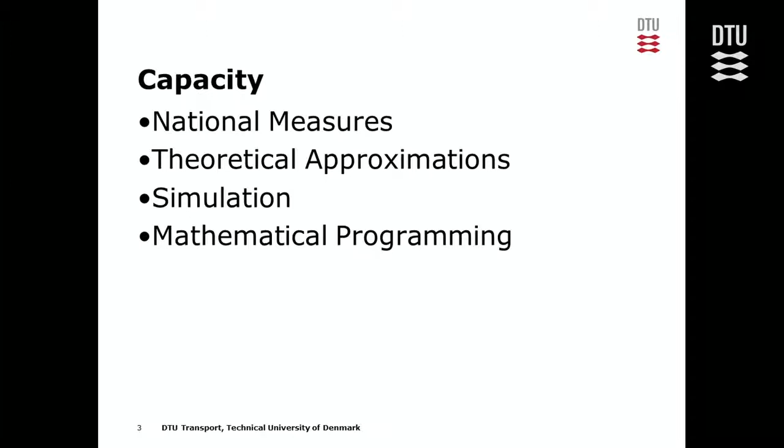So we're going to talk about the measures of capacity. And I'm also going to speak about these in national terms, because there are very different ways of viewing the business enterprise by nation. North America does business accounting very differently from Europe. There are differences of opinion about how things should be counted on the books between European and North American businesses. And there are different ways of measurement that are considered a priority in North America and in Europe for railways. So we want to be aware of that.

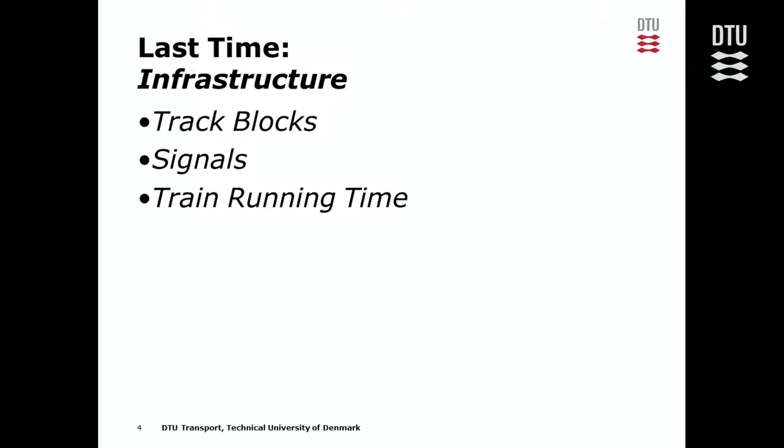We'll talk about theoretical approximations, parametric measures mostly, simulation, and then mathematical programming, which we've already covered, so we won't talk about that a great deal because we had a whole class on it a couple of weeks ago. Most recently, we got our grounding in the track infrastructure. So we know about our resources. We know about track. We know about train equipment. We've just done a homework assignment calculating the cost of resources. And we talked about signals and train running time over the infrastructure. So these are foundation pieces to build on going forward in capacity modeling.

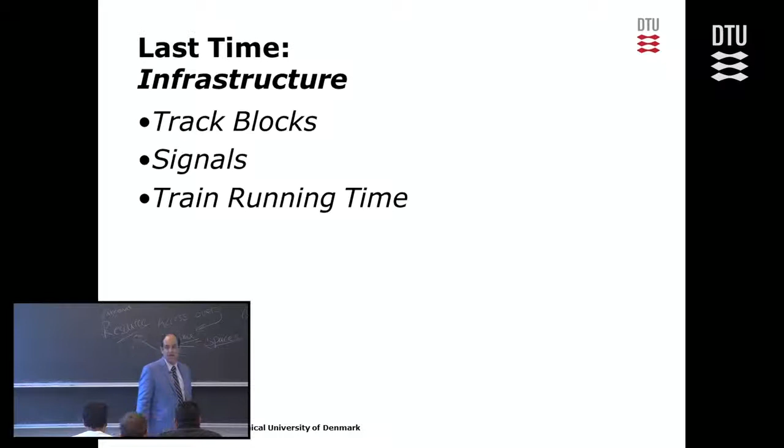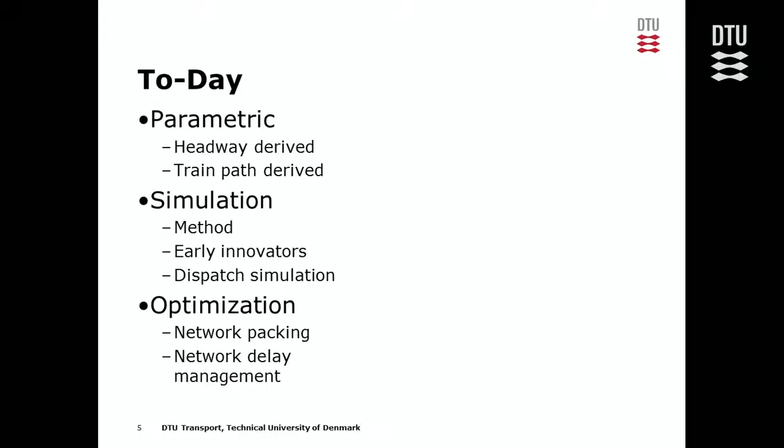So today we're going to go through parametric measures. We'll talk about headway measures, train path measures. We'll talk about simulation. I'll give you some nice pretty screen pictures of simulation products for capacity modeling. And then we'll quickly review optimization, which we've already covered, so we're just tying this topic into today's conversation about capacity modeling. What is capacity? Capacity is the capability to support traffic.

Traffic over a known resource, over a known piece of time, and then space defining the geography for us in transportation over a certain distance and geography. Time, space, and resource. What traffic can that support? That is what we're concerned about in capacity.

The problem is traffic has two fundamental components. Not just transportation traffic, but any business enterprise. If you go study operations management, if you take a hike across campus to the pretty building that DTU Management has, you will study operations management and you will once again learn that business services have two dimensions, volume and robustness. And they are constantly at war with each other. They are conflicting demands very often. So we are interested in transportation traffic, and we will see that there's a volume measure and a robustness measure.

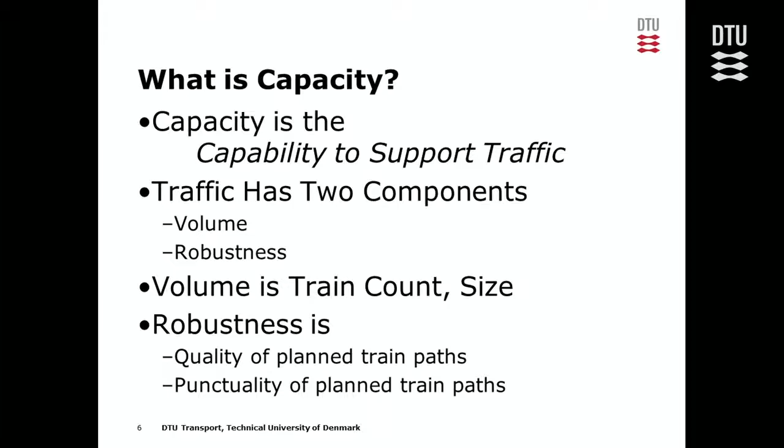Volume is flow, it is the rate of flow, it is the traffic, it is how many trains can I get down the track. So limitation. Sorry? So it's called limitation? Traffic is an output. It's not a limitation. It could be constrained. We will find that there is an upper limit to our capacity. There's a hard physical limit. We can see various configurations of resource and time that do dictate there is a hard limit to that capacity. We are going to measure that capacity in terms of the count of trains, the volume.

And if you get really economic, really supply chain oriented, you might say, oh, what if I make a bigger train? So I have the same number of trains, but now I have more volume because I'm carrying more freight, I'm carrying more passengers. Double-decker passenger train, stuff like that, double-decker car, superliner. Robustness is the quality of the train paths.

So we can get a lot of flow through the line, but if that flow is with a lot of station stops, or that flow is with a very bad travel time for the customer, or if that flow involves inconvenient travel times, or if the punctuality of the flow is really bad. If we have a high average flow, but our variance, our timekeeping is really bad. That is, we have a very high variance, we have a very high source of error, we have a very high probability of delay at the stations or en route. That is a robustness measure that we are making worse. That we're getting high variability means bad robustness. And so that's another measure of capacity.

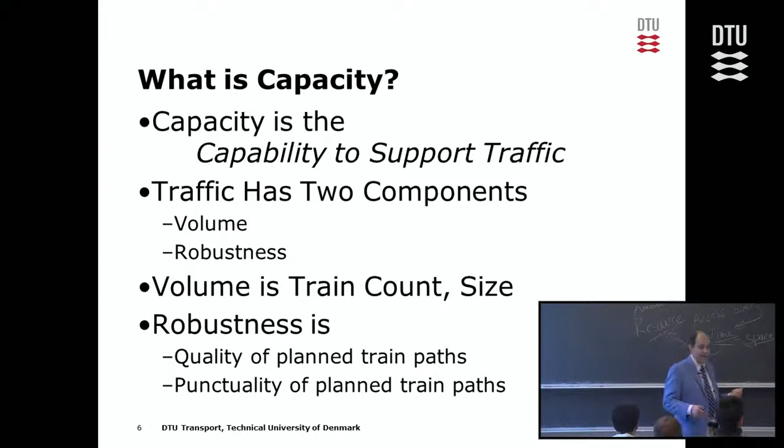And the reality is that the two continents, the two different ways of thinking about capacity have basically followed these two lines of reasoning. And they are rooted in legacy thinking, they are rooted in historic precedent, they are rooted in fundamental assumptions about the economics of rail transport and the services provided to the customer and how we're going to drive this thing. And so in North America, the fundamental measure of capacity is train delay.

You go on a business call, you go on a meeting with somebody from Union Pacific or BNSF, you go to a conference, you go to a discussion with anybody from North America, and you start talking about capacity, and they're going to start throwing numbers at you like, how many minutes of train delay per mile do I have? How many delayed trains did I have yesterday? That's their measure of capacity. The delay, they are focused on delay as their measure.

They are implying that all of the delay is a reduction in capacity because we are slowing the trains down, and if I slow the trains down, I'm reducing my flow, Little's law. Longer travel time must mean that the flow is going down if the capacity stays the same, if the inventory stays the same in Little's law.

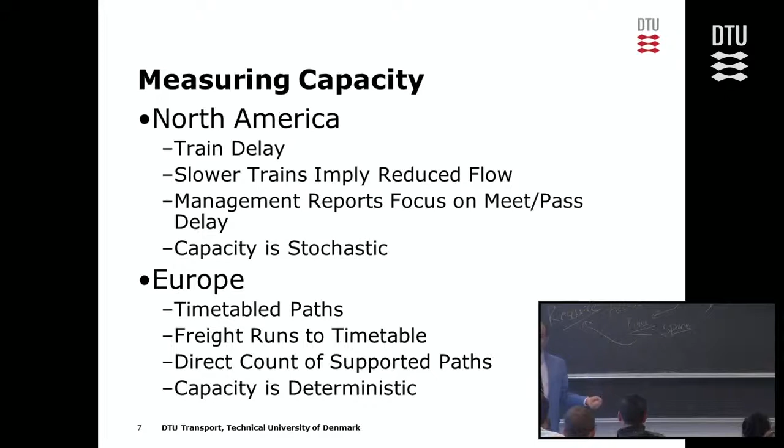In Europe, it's all about measuring flow, because in Europe, the presumption is that we are on time. There isn't going to be any delay. We're all running to a timetable. There is no delay. This is the timetable. The train's going to run to this timetable, and there's no argument, there's no discussion. This is the timetable. Platform 2, 13:52, stand there. The train's going to be there.

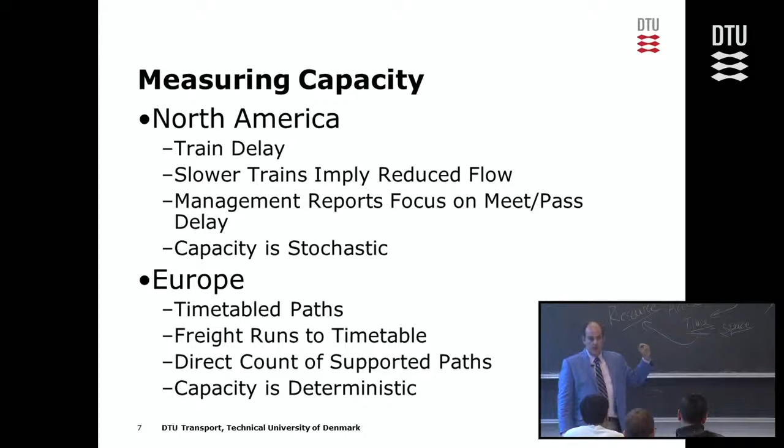So with that assumption, then, we are all counting train paths. We are counting rates of flow in our conversation about capacity in Europe. We're counting train paths. And you see that in the conversations people have, and you see that in the way the software generates results and the way the software generates output.

Here is a sample output for North America. And I chose this just to reinforce this: you look at this table of data, and it's all about delay. How much delay do I have? How many delay minutes per 100 train miles do I have? This is a very typical kind of management report for a North American railway system, because this is where they're focused. This is what they're all about right there.

Little's law again, right? Let's refresh this. We've talked about this before. Inventory equals flow times time. So now we're going to flow this around. We're interested in capacity, so we're going to say capacity is flow. Capacity is a rate of flow. How many trains per hour can I get down the railway line? It's going to be a function of how long it takes the train to get down the track, and how many trains the track can hold. That's my capacity right there.

And very often, time delays mean time gets longer, time gets worse. So North America is looking at this and saying, hey, we're going to keep this time tight, squeeze this down, no delays. We're going to call in that crew that just delayed the train for an hour. We're going to, quote, call them on the carpet, as they say in North America. What does that mean, call them on the carpet?

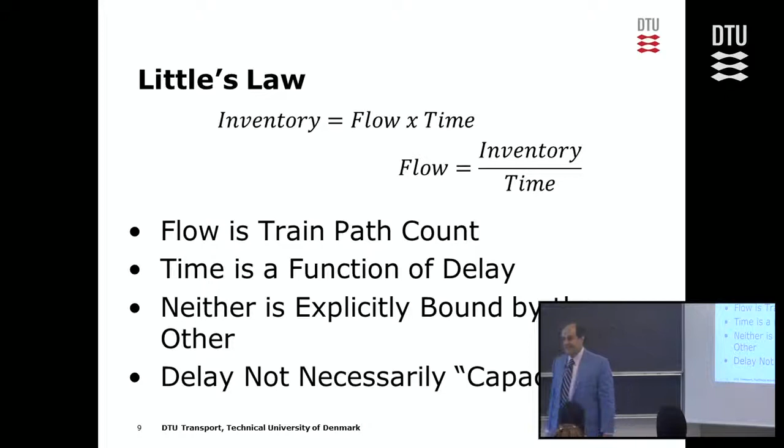Yeah, it does, but why is it call them on the carpet? What is it about the carpet? See, it has no meaning here in Denmark, because there's no damn carpet anywhere. I miss carpet. I really miss carpet. The hardwood floor is just getting a little old after a while. Where's the carpet?

So you're a train crew. Yes? Yeah, exactly. You're a train crew, and you're wearing boots and overalls, and you're greasy and you're dirty. And the executives up in the boardroom have carpet in their offices. So if you get called on the carpet, you're being called up to headquarters to explain yourself. What did I do wrong? So you've got to explain the time delay, because this is the function North America cares about.

But in Europe, this is assumed under control. So in Europe, we're about how many trains can I pack into the network? We focus on the track diagrams, the station diagrams, and allocating trains to platforms and stations. How many trains can I pack into the station? Well, that's inventory. The more inventory I've got, the more flow I've got. How wide are my blocks? Let's make more signals, more blocks. I can pack more trains on the network. Increase my inventory, more flow.

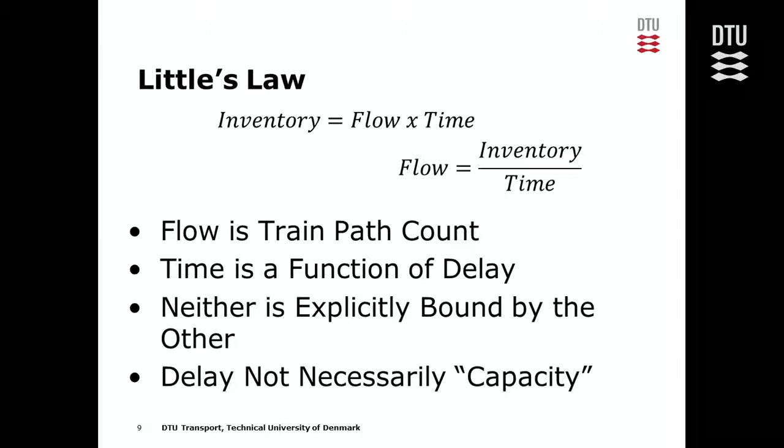So, time-centered, resource-centered. This is where we're at typically in this conversation. It's changing because some things are starting to merge. Europe is trying to reinvigorate freight transport. That means talking about longer freight trains, and some major changes to the network. North America has a very congested network, and can no longer, at least in the research that I have argued, focus only on delay as a measurement of their dispatch and of their rate of flow.

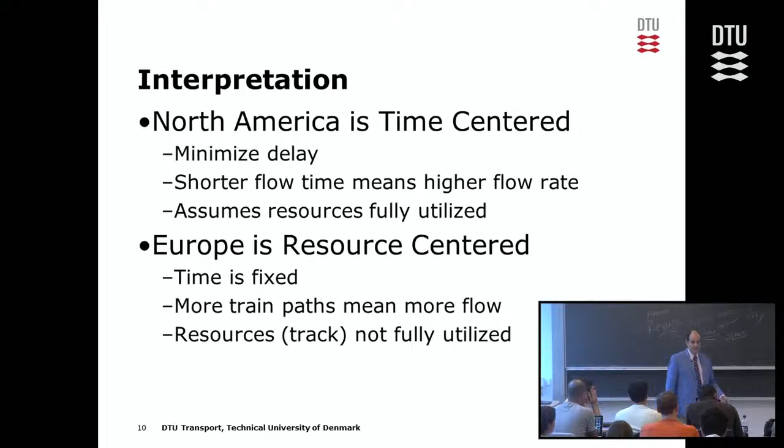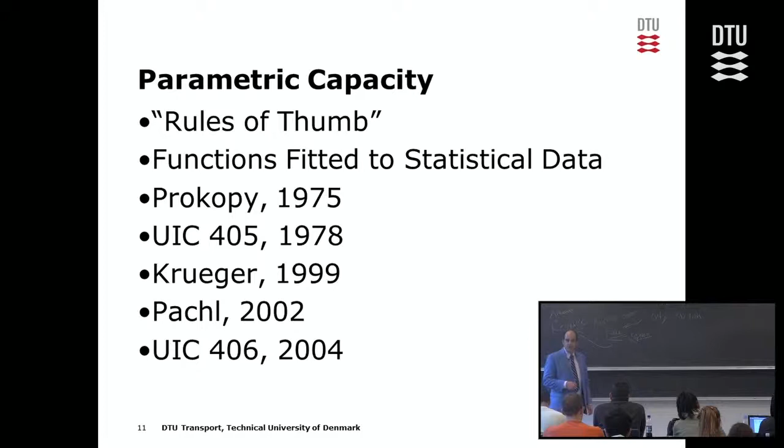So let's talk about parametric measures. We've kind of mentioned this before; I've used the word parametric. These are various rules of thumb. We're going to fit these things to statistical data. There are a couple of key players in this conversation. You can find more, but these are the ones that I have argued are the benchmarks, the touchstones of our history of railway engineering. This guy, Prokopy, I'm probably not pronouncing it correctly, goes way back. This is one of the very often cited measures of railway capacity.

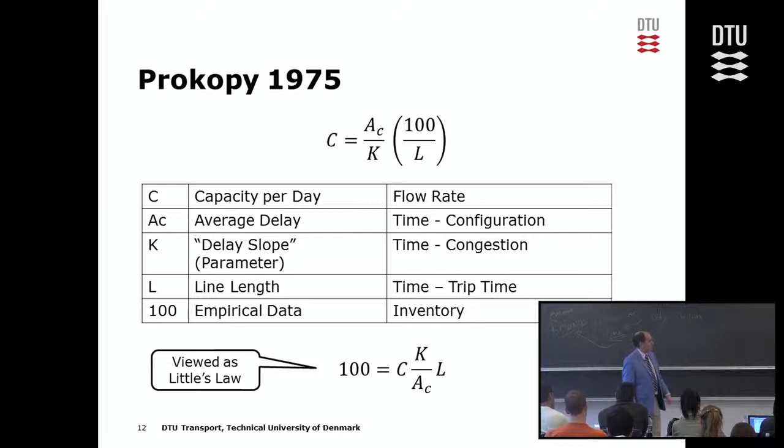Again, this is a parametric measure: he's taken statistical samples of data from real operations and fitted it to a function. And we are using something very much like Little's Law here. We have a placeholder for inventory, and then we are manipulating time and rate of flow in these equations to get a view of our capacity. And then we have the International Union of Railways. That is French, right? Union Internationale des Chemins de Fer, something like that.

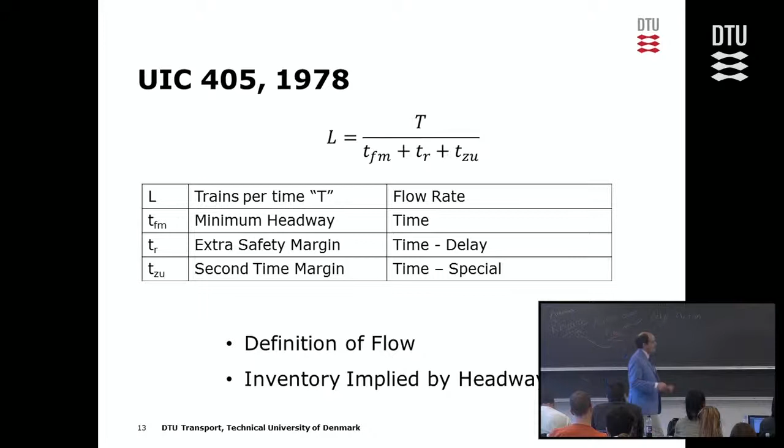That's our international union right there. And so back in the 1970s, they're really focusing on flow. They're focusing on headways, and they're focusing on ways to measure how much flow they get, not really getting the full measure of capacity in terms of Little's Law.

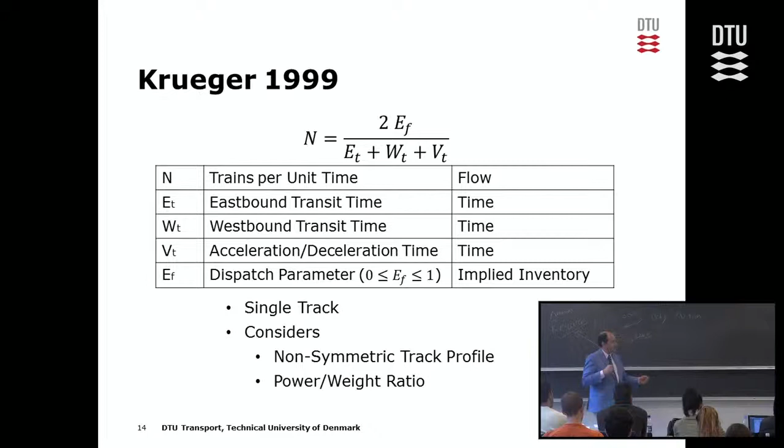So we move forward in time here, and again, we're still looking at flow. There's a little bit of an implied inventory with Krueger here in this equation, but this is significant in that he is trying to look at two-way directions on track, because we have single-track railroading in North America. Krueger's a Canadian guy, Canadian National, and he's concerned about single-track railways, so his function has a provision for opposing traffic in his estimation of capacity on the line.

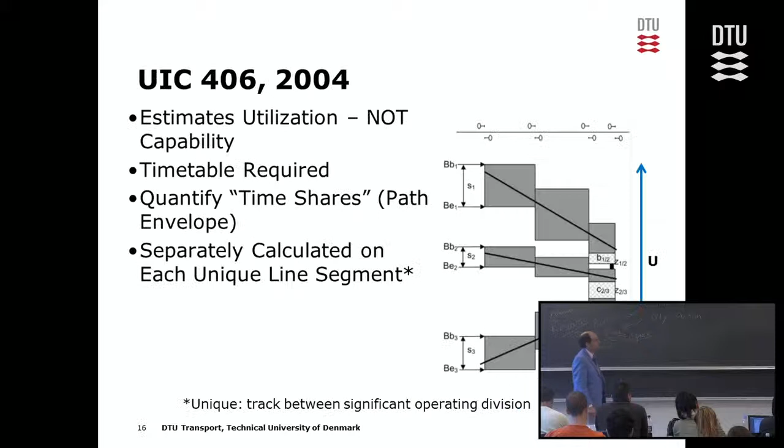And then finally, the UIC 406 method. This is really kind of state of the art in terms of how people visualize capacity calculations in Europe today. This fundamental idea is timetable compression. And the key word is timetable. You have to have a timetable before you can use this. Most railroad traffic in the United States does not run to timetable, so this is totally irrelevant to North America because we don't have a timetable in the first place.

Most train traffic in the United States is randomly dispatched, like a taxi. They line the trains up in the yard, and they look for a clear slot in the track, and they say, go. And the train pulls out, and you cross your fingers and hope it gets there. And seriously, I'll tell you why. Much of North America, it's getting better.

It's getting better, especially on high priority lines, lines like the racetrack, the Transcontinental Corridor on the BNSF, that's Los Angeles to Chicago through New Mexico. That's a racetrack. It runs intermodal trains. They run like streetcars. I've done this. You can stand up on a mesa and look out for miles across the Breaking Bad territory of New Mexico, and you can see the BNSF main line, and you can see multiple intermodal trains running in the signal wake of each other out in the heat of the desert.

You know, 3 or 4 intermodal trains, each one of them like 70, 100 cars long, following each other with a 2-block separation along the track. And they have to really hustle, because that's all those Christmas lights from China coming to Chicago. They're coming by container. They're unloaded at Long Beach, Los Angeles. They go onto a container train. They go to Chicago, and then they go to Walmart. And that's how we get all the consumer goods in the Midwest so cheap.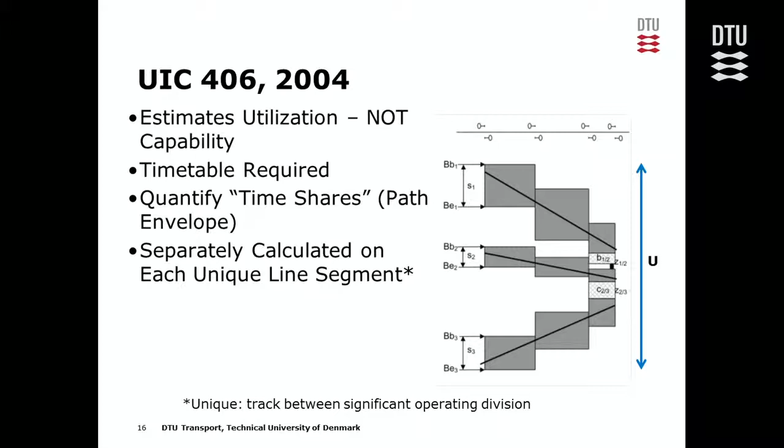So they're getting more picky about this kind of stuff. But they really still manage a flow. Tonnage-based railroading is what it's called. Tonnage-based railroading says, I'm going to store freight cars in my yard. I'm going to store up freight in my railway yard. And when I've got enough tonnage to make an economical train, I will call a crew, literally call a crew on demand.

Railroad crews in the United States work on demand. They do not have a schedule. They wait at their home for the phone to ring, and then they go when they're called. The crew shows up, couples up the locomotive, tests the air, and away they go. And if you're tonnage-based railroading, it means you're minimizing the horsepower per ton. It means you have trains that just have enough horsepower to basically make it over the highest grade profile on the line.

And what happens is you have a bad rainstorm, you have a miscalculation, you have a flat wheel, you have a locomotive with a turbocharger that's acting badly, and now suddenly a train stalls on the hill and you have to double the hill. You back the train up, you cut the train in half, you bring the train up the hill in 2 pieces. And you've just locked up the whole network for 3 hours behind you. So that creates a lot of variance.

Now, they're getting better at that. They're doing a lot to really stop doing that. That doesn't happen the way it used to. A lot of operations research techniques are being applied to doing things like, let's not make that happen anymore. More carefully matching locomotives to train size, more carefully managing these kinds of things.

But the reality is, in North America, we are still running a tonnage-based railroad, and that does lead to a lot of variance and a lot of delay on the network. So anyway, UIC 406, Europe, we're going to compress this timetable. We've got a timetable. We have our train paths. There's our track network right there with some signals showing the blocks.

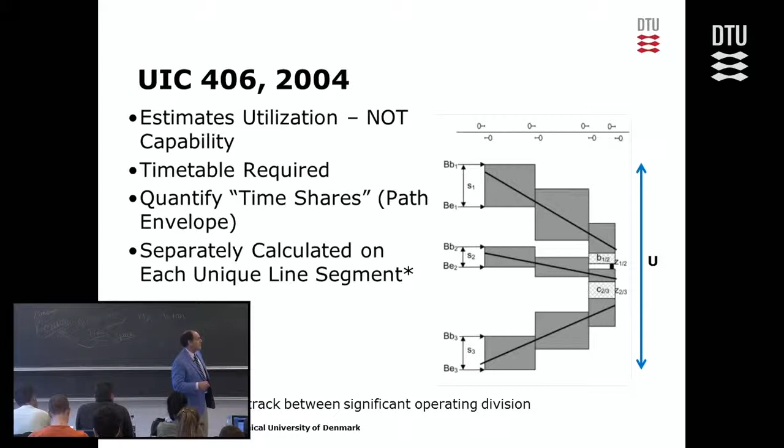And in this particular case, we have a 2-directional track. The signals are facing both directions here. So just for argument's sake, let's say time is going up this way. So this is 9 a.m., 10 a.m., 11, 12, 1 o'clock, 2 o'clock, 3 o'clock, et cetera. And so this train is going that way on the track. This train is going that way on the track. But this train is going the other way, is going down this way.

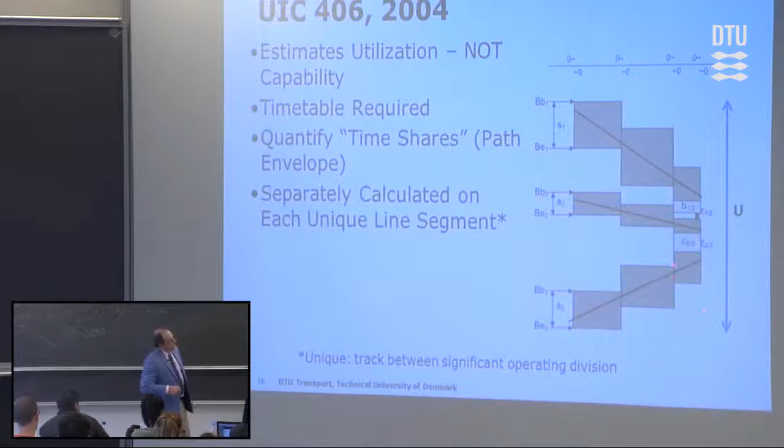And these are what we're going to see here in a few minutes. These are called the block occupations. And so the idea here is this is the timetable for the track network. And this boundary, this edge and this edge here, are the total amount of time occupied by these trains on the network at this point in the conversation.

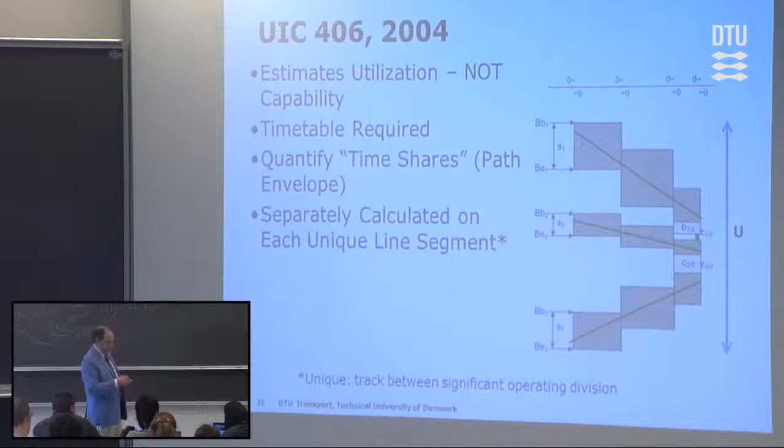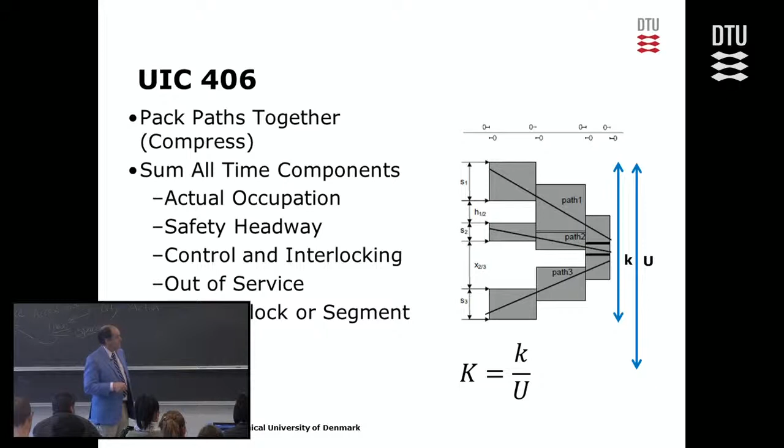And what we're going to do is then manually, or with the aid of some software perhaps, but essentially just redraw this picture and squish these paths together until they're touching, until they just bang up against each other. And we're going to ask our question, how much time on the network will these train paths consume if we squish them all together into the tightest pack we can get?

Measure that, which is this lowercase k right here. How much time do they occupy on the network when they're completely pressed together, as much as they can be safely? And then we have our utilization of the network. So the UIC 406 is not really a capacity measurement in the sense of a quantity or in the sense of what is the rate of flow. It is a utilization measurement. So it says, what % of the resource am I utilizing? How efficiently am I utilizing my resource with this particular timetable or with this particular track configuration?

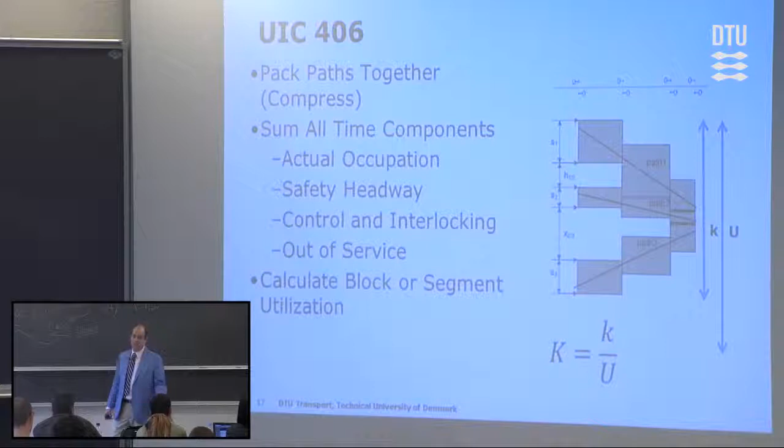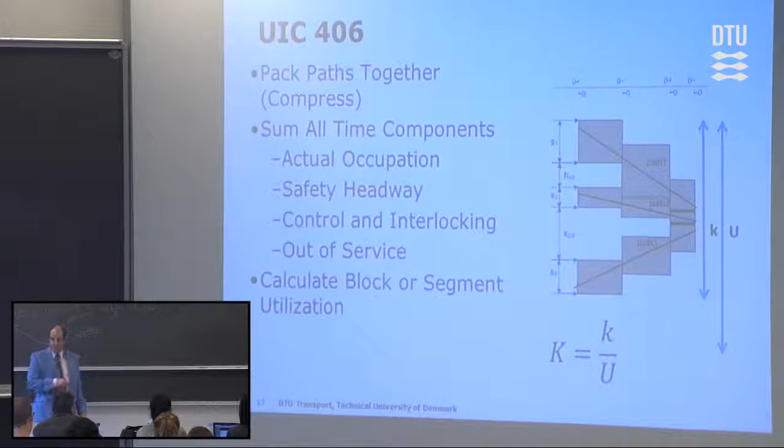We will spend more time on this. After the coffee break, we will have some exercises and we will look at this again in some more detail. But it really is pretty much just exactly what I just told you. You can have better tools, you can have things that automate the process for you, but if you got enough time, you can do this whole thing by hand on paper, just like I just demonstrated.

So those are parametric methods, equations, manual methods to kind of estimate the consumption of the track resource. They are all static. I'm going to back up a second here. Static, static, static. The answers don't change. I can go through these slides 5, 6, 7 times, but the answers don't change. The answers are all the same because I put some numbers in and I give you an answer out and we're all done. We go home for coffee.

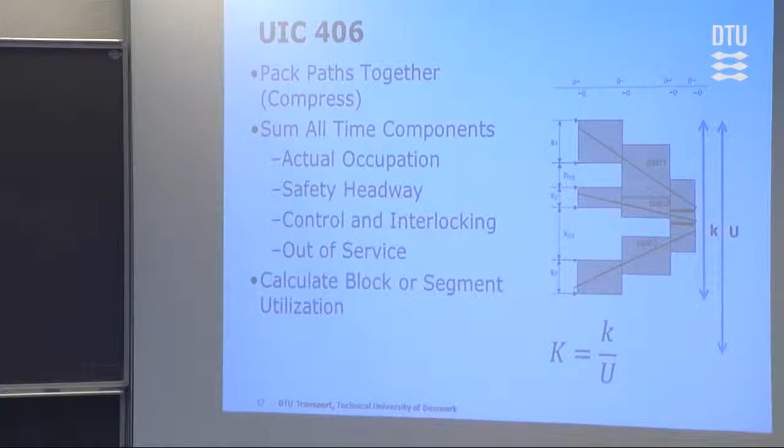But the reality, of course, we know is, as I just described with the tonnage-based railroading in the United States and in Europe, little things like little old lady gets stuck in her wheelchair at the entrance to the coach and suddenly the train can't pull out of the station, stuff like that. We have variance. We have random delays. We have weather. We have service issues, we have breakdowns, we have random delays.

And so now we want to measure the capacity of our network for its robustness, for its ability to carry traffic, within a certain boundary of robustness, a certain boundary of reliability. And to do that properly, we then do need to use simulation. We need to randomly sample patterns of operation and evaluate how the network responds to variation in inputs, variation in weather, variation in train behaviors. And so that's where we get simulation.

Those of you who may have had some prior experience in, quote, simulation, discrete event simulation is what we're really talking about. These are all various simulation tools specific to railways. They are discrete event simulation tools specific to railways. Canadian National in North America is the leader, the innovator in this back in the 1950s. Way back in the age of the mainframe computer, the IBM mainframe, Canadian National started writing simulation programs to simulate the traffic that they had on a single track railway across the Rocky Mountains in Western Canada.

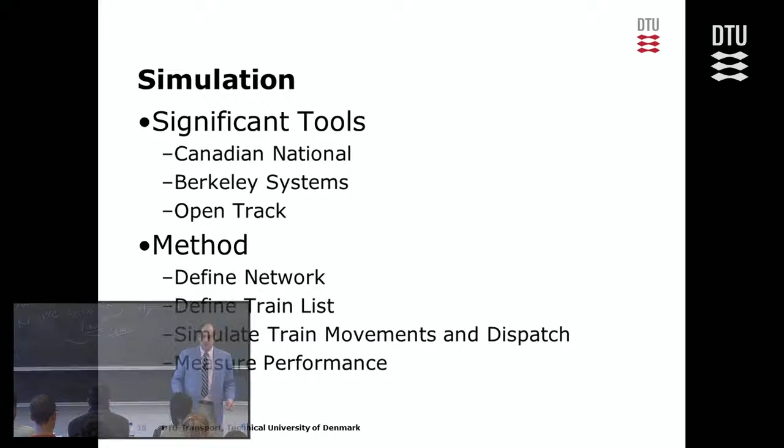And so they were leaders in this. And then more recently, we have this company called Berkeley Systems in North America that is pretty much the de facto standard for simulating North American railway track operations. And then OpenTrack is another method that's kind of a big standard here in Europe, although there's more competitors in Europe. In Europe, we have a few more competing companies doing this kind of thing, but OpenTrack is a very good example. How do they all work?

They're all very similar. They have to have some kind of user interface for defining the track network, some way of inputting data into the system that says, here's the track, here's where the signals are, here's where the blocks are, here's how fast the locomotive can accelerate. All this information has to be put into the network, and then we define for the simulation, what trains do you want to run on this network? What kind of schedule do you want to run? What kind of pattern of service do you want to run?

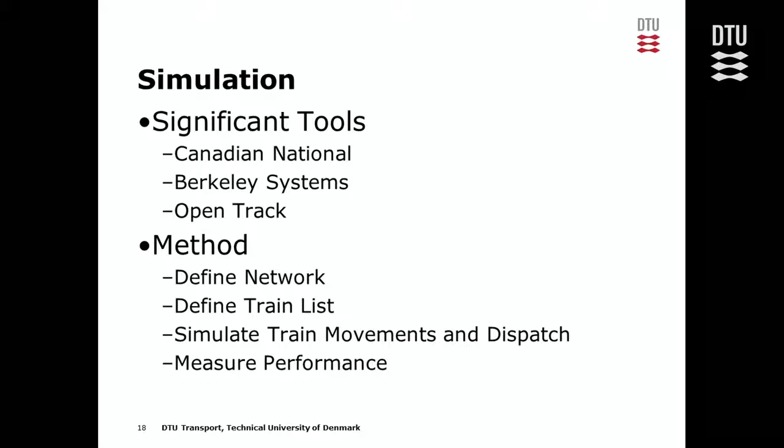And then we want to simulate the train movements. What does that mean, simulate? For those of you who don't know what that means, it means we have a train, we have a process that's going to run, but we know for a fact that this process is subject to random variation. So we are going to input into the simulation software the statistical formulas for the distributions, the random probability distributions of the things that might happen that are not specifically known, that are random.

And then we're going to tell the software to run a game, almost a game interface. We're going to run a game of the dispatch for a day, and we're going to randomly sample things that could go wrong with those trains and fit them into the pattern that the game is simulating of the train movement. We're going to collect the data from that run, write it down in the database or in the computer software. We're going to back everything up, and we're going to do it again. And the software is going to pick a new set of random numbers that simulate the various things that could happen to this train and do it all over again.

And the software is usually going to do this hundreds, thousands of times, and then aggregate all of these results from these random samples and give you some kind of statistical picture of, here's what I think is likely to happen with this rail network over a variety of possible outcomes. So let me show you what that looks like.

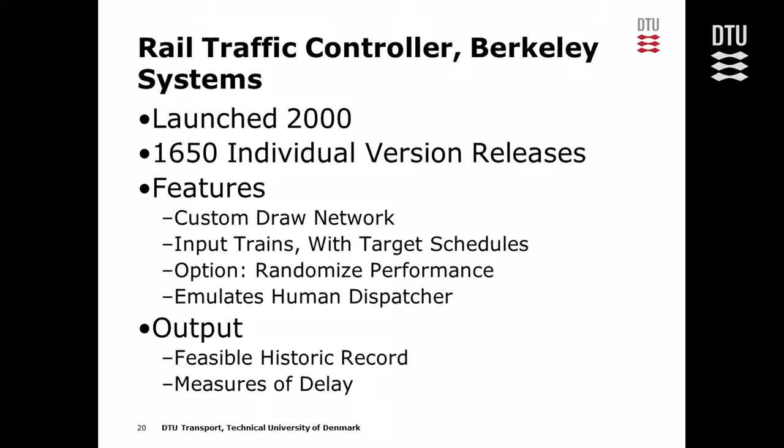Of course, here I mentioned to you already Canadian National. We've talked about this signal wake model. I've talked about this in terms of signals and in terms of run speed. But again, you can look in the quoted literature from the guys in North America, and they're really focused on delay per train mile. And so how are we going to do that? Berkeley Traffic Controller. I'll just jump straight to the fun pictures here. So here's Berkeley Traffic Controller.

And then you can tell it, okay, SD40 diesel locomotive, 6-axle power. How fast can it go through a 20-degree curve? How long does it take to clear the switch? How many feet does it have to be before it's in clear of the switch and the points are open? All this kind of stuff. You can put all this into Rail Traffic Controller.

And then we tell Rail Traffic Controller, oh, I want to run a whole bunch of coal trains. I want to run 12 coal trains, and I want a general mixed train, and I want to run an intermodal train, and I'm going to set that all up in the little kind of, quote, timetable. It's not a timetable like you understand a timetable.

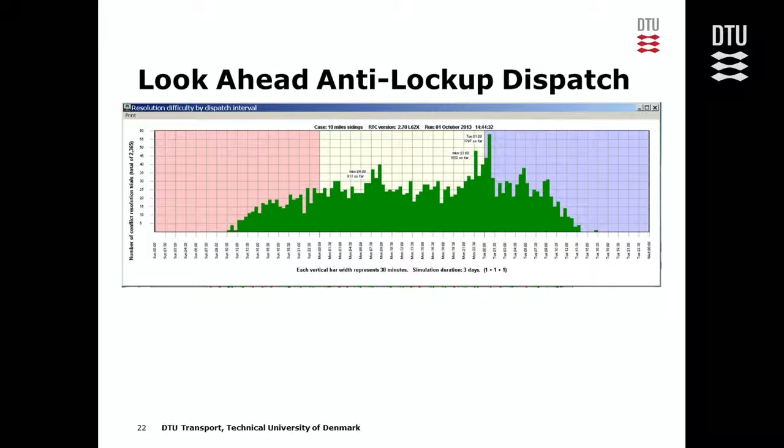It's just a wish list of trains I want to be running on this network. And Rail Traffic Controller's big selling point, its big feature for the North American market, is that its calculation engine is designed to emulate the behavior of a human dispatcher under North American service.

So you say go, and it lines up these trains for their departures, and then it starts simulating things like, this locomotive just had a brake failure. This train got stuck on wet leaves, and it can't get up the hill. This train is running slow because there's something goofy going on with its diesel prime mover. And it simulates all that, plus all the interferences on the single track line, and where are we going to meet and pass the trains at the sidings.

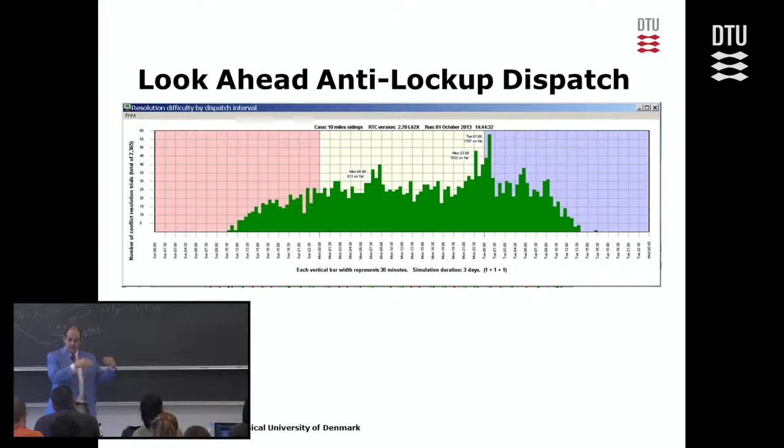And it simulates what it believes the typical human dispatcher, because most traffic in the United States is dispatched by human beings in a dispatch center, and it still is true in Europe too. How will the dispatcher plan that dispatch? And it simulates that. And then what we have here is a graph that Traffic Controller generates while it's running the simulation.

This bit here is the warm-up cycle, where it's just warming up the random number sequence for the simulation. This is the actual sample period for the run of the simulation. And then this is the cool down at the end of the simulation. So this is really where the data is collected from. And this green stuff right here is, quote, the dispatch conflicts that are resolved.

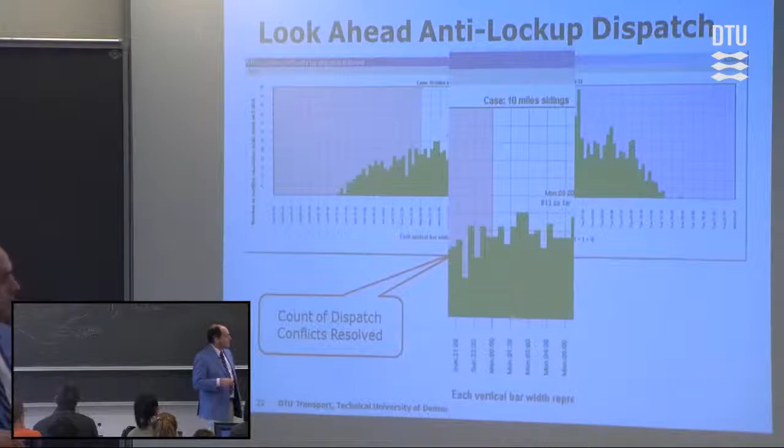So Rail Traffic Controller starts plotting out the positions of the trains. And then when it sees a conflict that cannot be resolved, it backs up its decisions and picks a different plan. And this is meant to emulate what a human dispatcher would do in North America.

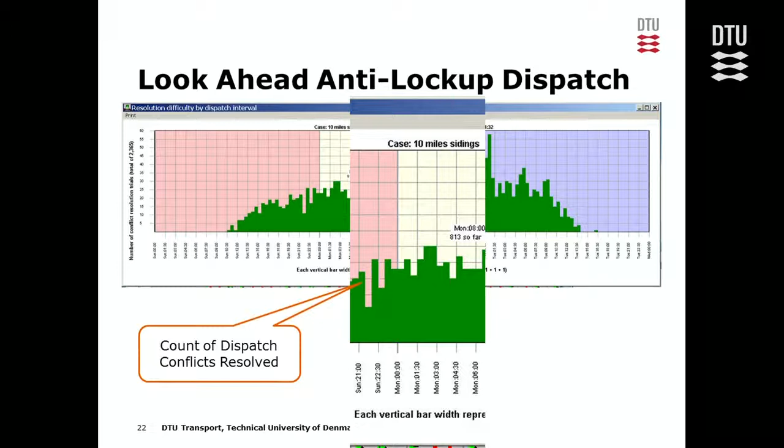A human dispatcher would start planning out their moves, probably on paper, probably using a string line diagram in a book, and then, with a rubber eraser, kind of back it up and change it again and see which way you can get the trains to go to get the traffic through the line. And so this is actually where Rail Traffic Controller is testing different alternatives and looking for ways to reroute the trains, like a human dispatcher would.

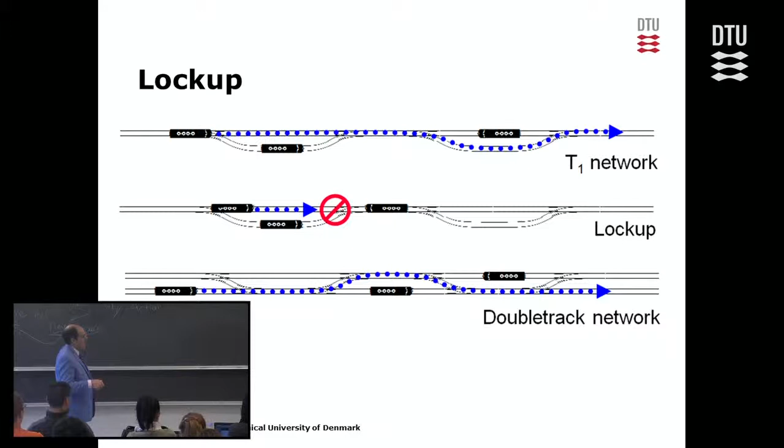And it's primarily concerned with something called lockup, which is a big, big deal, especially in single track railroading, but it can also be a problem on double track lines too. Lockup is a situation where you have dispatched a pattern of trains, and some guy makes a bad mistake, and he allows this train to come forward before this train has made its path through. That train is now there. This is lockup right there. There's no way for this network to go forward without a train backing up.

Not something you want to do. Not something you want to explain when you are called on the carpet and you have to explain why you gave an instruction to the conductor of a train to back his train up on the network. So lockup, you want to avoid that. It's like painting yourself into a corner, to use another English expression. You don't want to sequence the trains in such a way that you suddenly discover you have no way forward, no way to unlock this Rubik's Cube of combinations of train paths.

And this can be especially difficult on a single track network, where you have trains going opposite directions, and it's not as simple as saying, I'll just wait till the traffic in front of me gets out of the way. Well, there is no traffic in front of you to get out of the way. This is a clear lockup right there. And you can still have issues like that on a double track network. If you're not careful, this guy moves to that position, and it's not quite a lockup, but it's still a very bad slowdown, very bad blockage on the network.

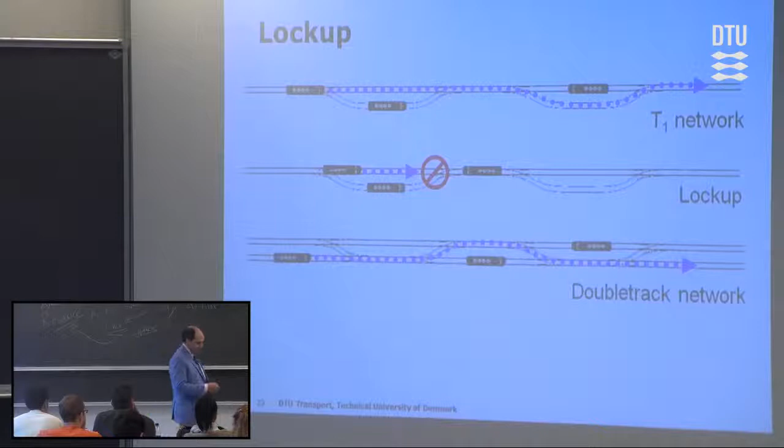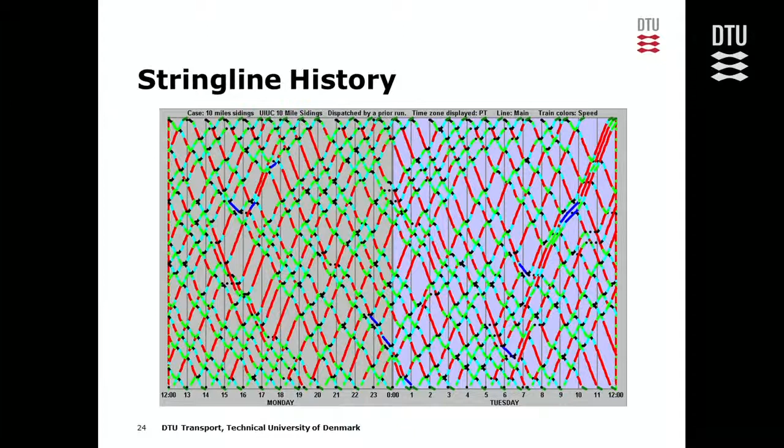So anyway, you run Rail Traffic Controller, and it will generate in its output a string line of all the dispatches that it did for a period of time. And then it will generate statistics on the run, and of course, what do we care about? Delay per 100 train miles, because we're in North America. This is what we care about. So Rail Traffic Controller gives you these numbers.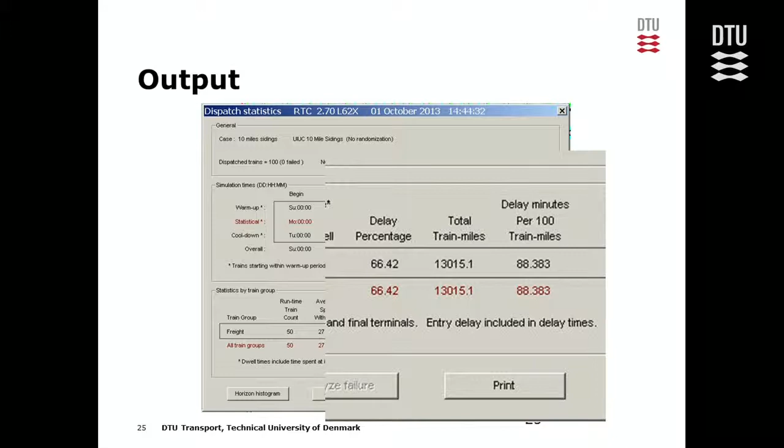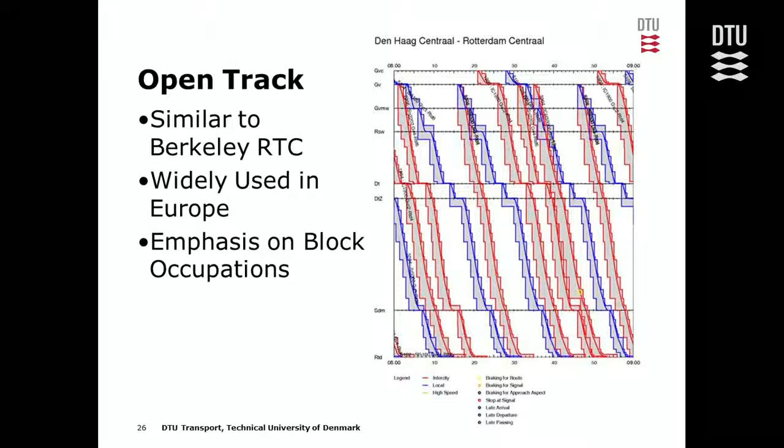Now, to compare that, we have this product called OpenTrack, which is a very popular, well-adopted software package for Europe for the same purpose, simulating the dispatch pattern, simulating the timetable of trains. The difference is that the key word is timetable. So OpenTrack really is focused on, I have a timetable and I'm going to follow that timetable.

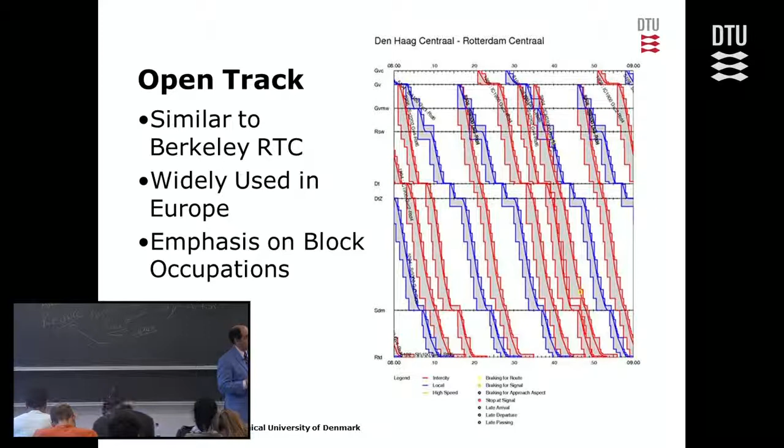So it's much more focused on keeping to the timetable and trying to return to the timetable after a disruption has happened. And it also is much more focused on modeling the actual specific block occupations. And you can see it in the output screens of OpenTrack and the kind of reports it generates. For example, OpenTrack will generate a Gantt chart. A Gantt chart is a resource occupation chart.

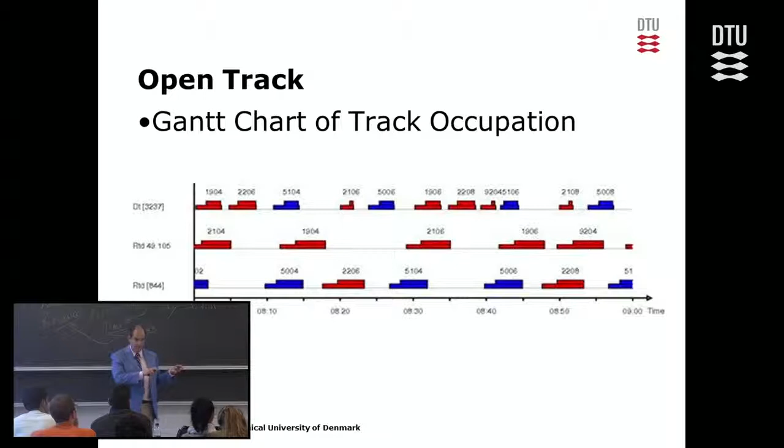These are tracks. And then these are occupations of the track. This is time. And these are occupations of a piece of track over time by trains. And the little top bar is the physical occupation of the train on the track. And the longer bar below it is the resource occupation based on safe signaling instructions. And we'll explain that here in a couple minutes.

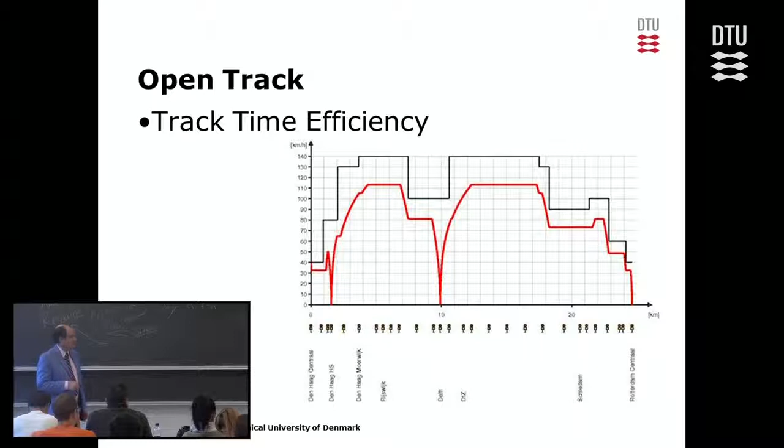And then it also has these charts where we see the runtime efficiency. It generates charts that show you what is the allowed runtime on a piece of track and what is the train actually possible to accomplish within these limits? And you can see here, we got a real problem because even though this track allows 140 kilometers an hour, this little bit right here kind of is a hard constraint, you might say. And the train has got to slow down right here to meet this lower speed limit on this track.

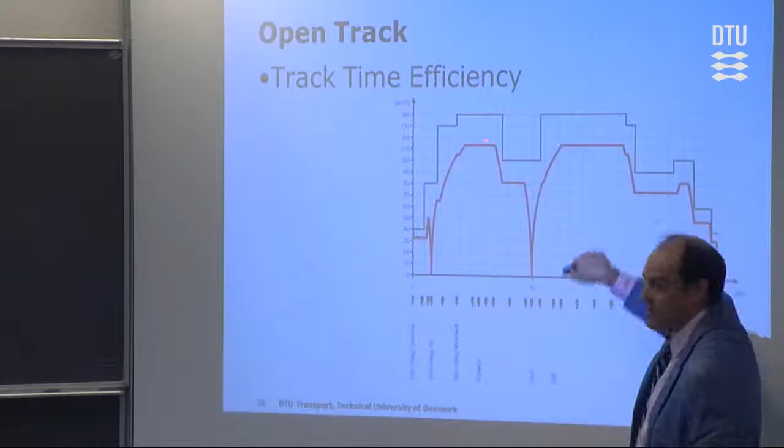So it possibly might be able to kind of go up like this and get to here and come back down, but it's almost completely wasted energy. It's all fuel burned to get it up to speed, only to have to put the brakes back on right again. So this is an area where we have a low efficiency because we really can't use that speed. That track speed is not really available to us. It's not really realistically possible to use it. And the same thing right here. We're really not going to use this.

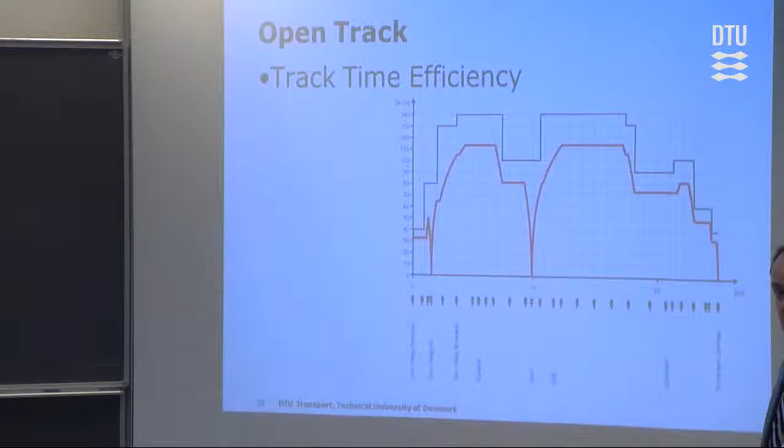So this is an example for an analysis where you might say, hey, do we really want to maintain the ballast and the rail on this piece of track for this extra little bump of speed? Or should we just drop the speed down? Should we just go ahead and back up and drop the speed down, save us some money in maintenance, maybe retime the signals for that lower speed?

A lot of decisions like that could be really studied in detail with a diagram like this, which isn't quite so important in North America because, you know, when you're running an intermodal train across the New Mexico desert, you don't see a lot of this. It's like open the throttle to run 8, put your feet up on the dash, wait an hour, and then maybe you'll get somewhere. So OpenTrack.

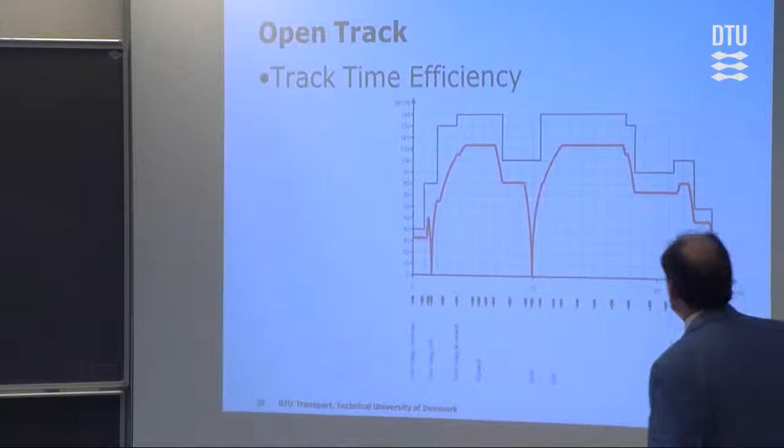And then, of course, mathematical programming. We've covered this in depth already in a previous lecture, so this is just kind of a recap of the topics that we've already covered. So how does mathematical programming fit into this? Well, mathematical programming allows us to say, I have a resource, I have constraints on my track network, and I will code those constraints into the mathematical program saying how much track do I have. And then I'm going to say how many trains can I pack into that resource in time and space.

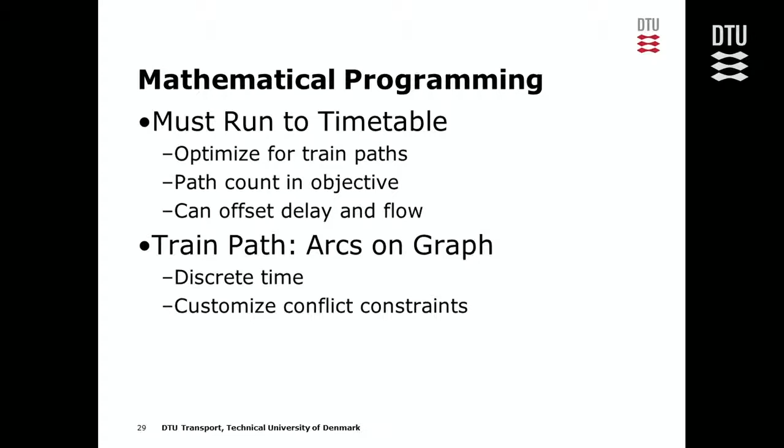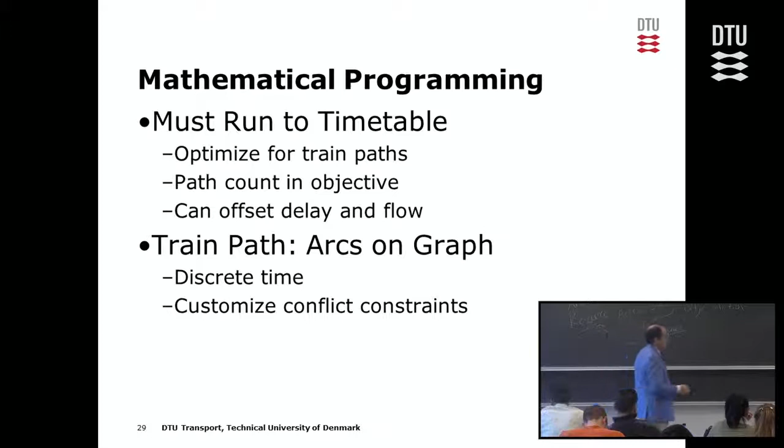So a lot of the mathematical programs that I've already shown you in previous lectures are basically a formulation that says, how can I maximize the number of train paths given a constraint that I got this much track and I got this much time and I got this much stuff going on. We've already seen formulations that are focused on delay minimization, again, addressing the North American concern. Much of the stuff that you will see further in something called the Burlington Northern ARES case study, which we will be doing in a couple of weeks, is based on this formulation.

A good friend of mine, Edwin Kraft, was with CSX for years and years a while ago, and he's published a lot on this stuff about jam capacity. How much can you press into the system before the robustness just goes off the charts?

Southern Railway was one of the few instances where they actually implemented it. Southern Railway in the United States, in Atlanta, Georgia, actually implemented a linear program in their dispatch center with an IBM mainframe computer, and they were doing dispatch planning with linear programming, but it didn't last very long. They had a merger with another railway, management changed, and they said, never mind, we're not going to do this anymore.

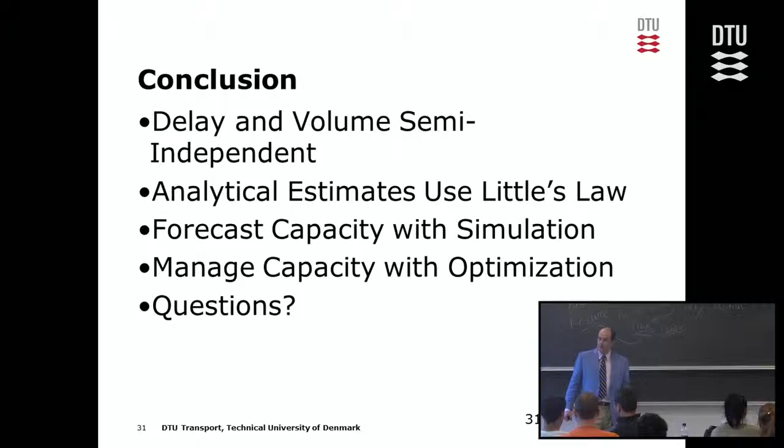So thank you very much. Any questions? Eric? What do you consider delay? What do I consider delay? Delay per train mile. In the United States, delay means the train stopped. The measurement is 88 minutes per 100 train miles.

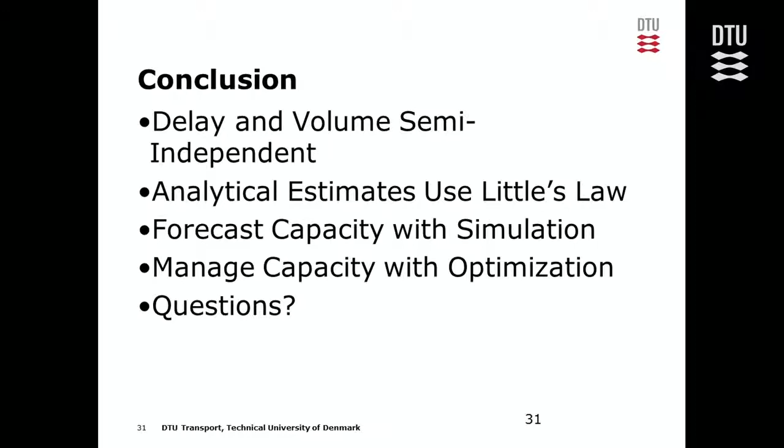The manager gets a report from the network, say Burlington Northern Santa Fe or Union Pacific, with thousands of track miles and hundreds of trains running each day. He's got to boil that down into a statistic, so they sum up all the delays trains experienced over the whole network, divide by the train miles run, and report that as an operating statistic.

Those delays could be a train held at the yard for lack of a crew, stopped at a siding for a meet for a couple hours, a broken coupler, which happens quite often and ties up the line for a couple hours while they replace it. Accidents, slow travel due to bad weather, a train running out of fuel, which does happen. You sum up all those delays and ask, why did we have these delays?